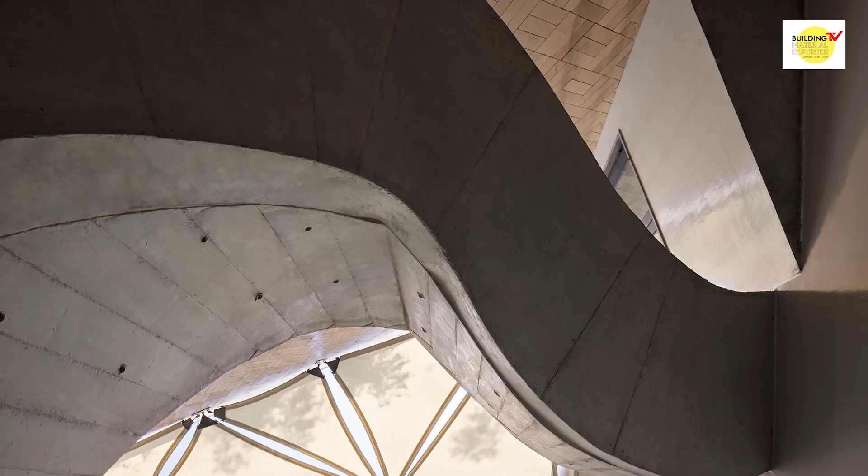At the first meeting, they said they wanted 3 most important things, over and above a long list of things. The clients are 2 kids, age 4 and 8, their parents and their grandfather, so 5 of them live in the house along with 2 didis. They said they wanted a slide in the house, that was their first requirement. The second was they wanted a football field inside the house. And the third was the sloping roof. They said, for us, we've always drawn a house with a sloping roof, that is what means a home to us.

They had a typical rectangular plot, and the way to do a football field on something like that, the first option that comes to mind is to either build right at the back or build a little up front, leaving a pocket of land for football practice. We tried a few options, but were never satisfied with the rectangular smaller sections we were getting front or back, because whatever you do, you would not get the entire length of the plot.

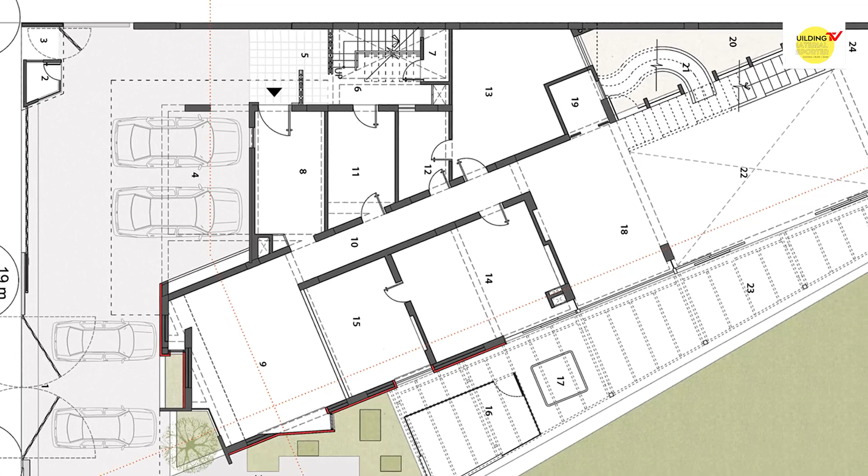Some part of the plot will still go to the built-up space. So eventually what we decided to do was cut the plot diagonally and place the constructed building in one half of that triangular plot, with the remaining triangle becoming the practice field. This means that at the back you get the entire width of the plot to move, and almost the longer length of the plot to run up and practice football.

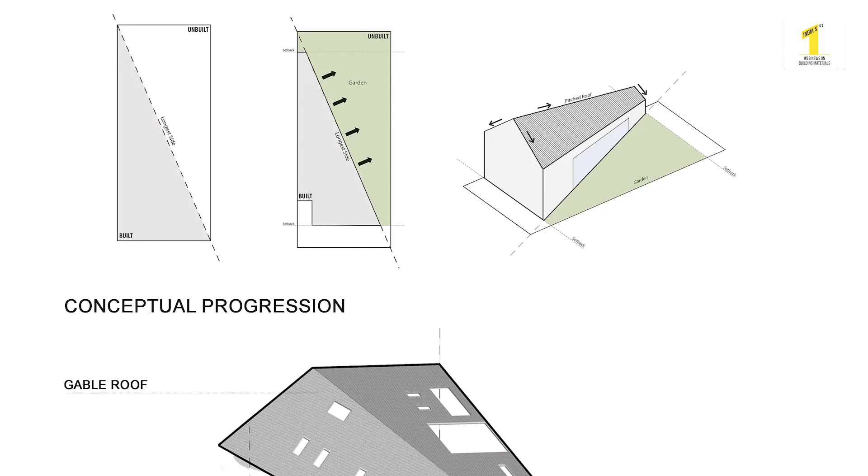We've never tried a layout like this for a residence. It was challenging because now we were fitting functions within the triangle, and I've been asked many times by other people whether it was difficult to fit these different little functions. But when you look at the plan, you realize that apart from one little courtyard in the center for light to come through, you have all rectangular spaces, or pentagonal spaces, which also work much better than tight rectangles.

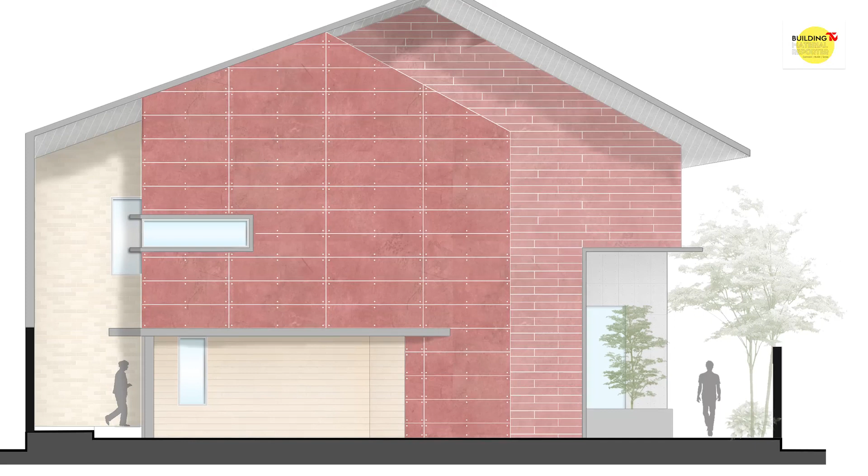We also started with a sloping roof on top, not only from the front, but sloping the entire roof elevation as it goes to the back. So the highest part is in the front, and then the roof gradually slopes down to a 1.5 floor height at the back.

So in front you get the master bedroom and the kids' bedrooms above the very small living room that we finally managed to have. And at the back, utility spaces, kitchen areas, and the rooms for the didis. And in the center, in fact half of the entire area, at 1.5 floor height, becomes this family space.

Because they said that even though we don't have a lot of guests over, we want this common space for the grandfather, the couple, and their two kids to spend all their time in. There is only one TV. They also said we do not want to have a lot of views.

What that meant was that they don't want balconies, they don't want large windows that open onto the street. Because of that, we gave them glazed openings to get light inside - windows so there was enough light coming into the rooms, but these were not opening right out of the front elevation. They were all opening at an angle, so no one can look inside and they don't feel conscious while sitting next to the window.

On the ground floor, however, we kept the entire elevation glazed like that because they have this long green lawn in front of the family space and they really wanted to have that connection with their open space. So that was the second thing.

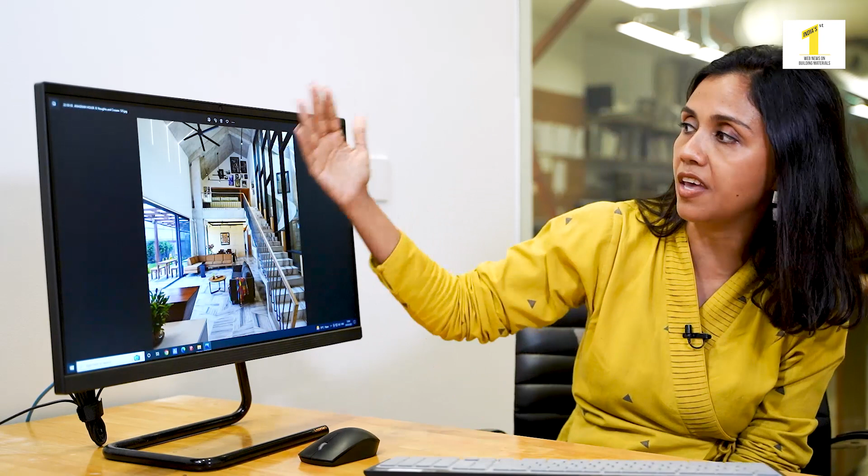We love the contractor we worked with on this project, and we were very happy and satisfied with how the finishes came out in the house, especially that of the slide, with this curving portion that comes down. So that's how we gave them this as an important feature in the open space inside.

So these were the three main items on the wish list. Apart from that, of course, there were many other things, one of which, again not something I come across every day, is a client asking to not put any electrical switches next to their bedsides.

They said, we do not want gadgets to be extensively accessible in the house. We have one TV which will be in one corner, and we want our kids to enjoy the house in as much playful, physical manner as possible and not fall into that situation where it's easy to get hold of a gadget and look at a screen.

So when a client like that comes along, it really forces you to think of various different ways a house can function. They said they have a lot of art, and with kids, they want to encourage looking at art, living with art, creating art all the time. They were very particular about having a maker's studio inside the house between the two kids' bedrooms.

They wanted the kids to be in the same space but also not in the same room. It's actually a single room with a sloping roof on top, and then there's a cabinet design in the center of the room which basically divides the two spaces. The door, which can be used to cordon off one room from the other, is hardly ever shut. So they may not feel part of the same space, but they're still within earshot of each other.

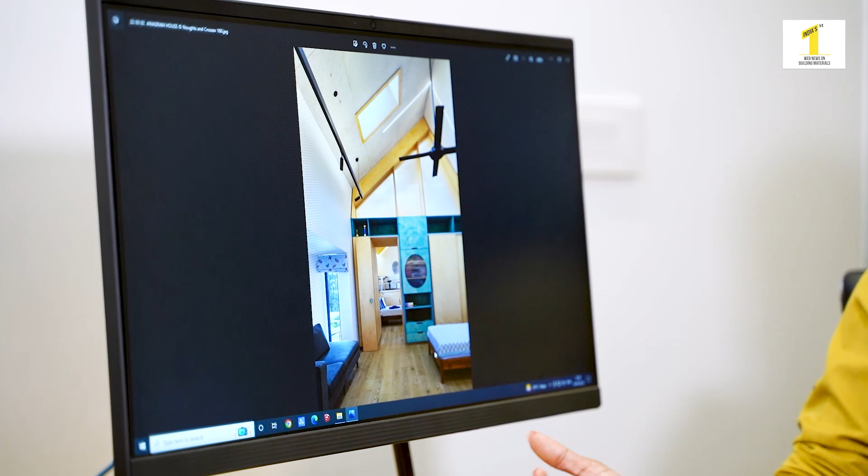Basically, they said the kids needed to feel like they were in the same space, even if as they grow up maybe they don't want to look at each other's faces. So around this floor, the parents gave themselves a much more secluded corner, and the rest was really taken up by the kids with their reading books in the corridors outside, which was quite interesting to do in this area.

Because we did not have a full-fledged living room here, we did have a small room where they could greet anyone, or a guest. So that little room is basically put in one corner of the ground floor, at the front edge of the building.

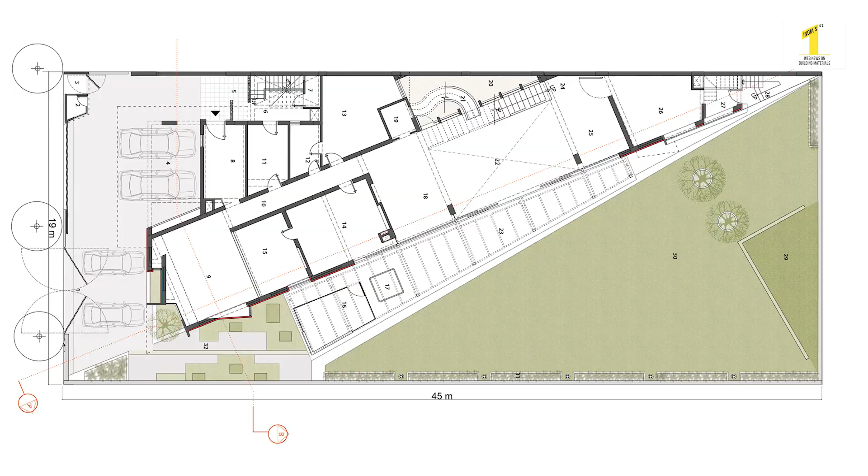More than 50% of the ground floor plate is taken up by the family rooms. This includes the staircase going up, the dining room, their sitting area, the kitchen at the back, and the grandfather's room in front. Their sun room or yoga room sticks out and also has a glazed edge, so it looks onto the garden on this side.

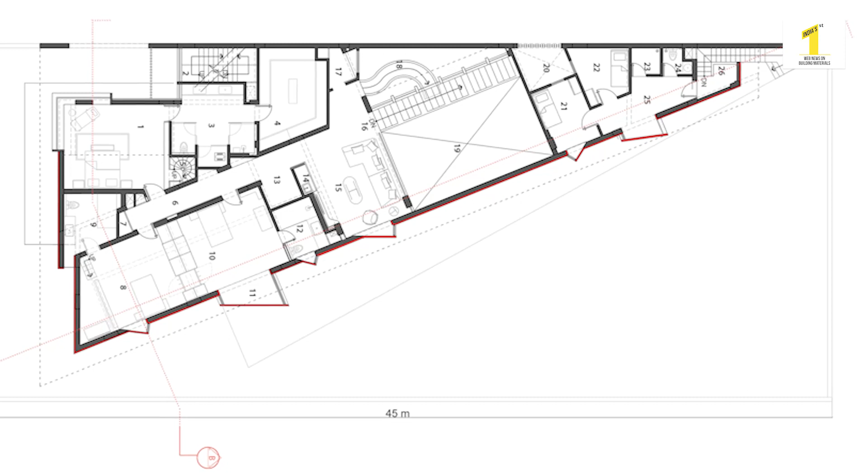So their ground floor is basically where they spend the entire day, inside, outside, depending on how the weather is. On the first floor, which is a slightly smaller floor plate, they have the two kids' bedrooms. There is the master bedroom and the ensuite bathrooms, etc. And at the back over here are the rooms for the didis.

The other interesting thing that we did in terms of layout over here was that the toilet does not open through the dresser, because they wanted the dresser to be even more private and not have any help going through it.

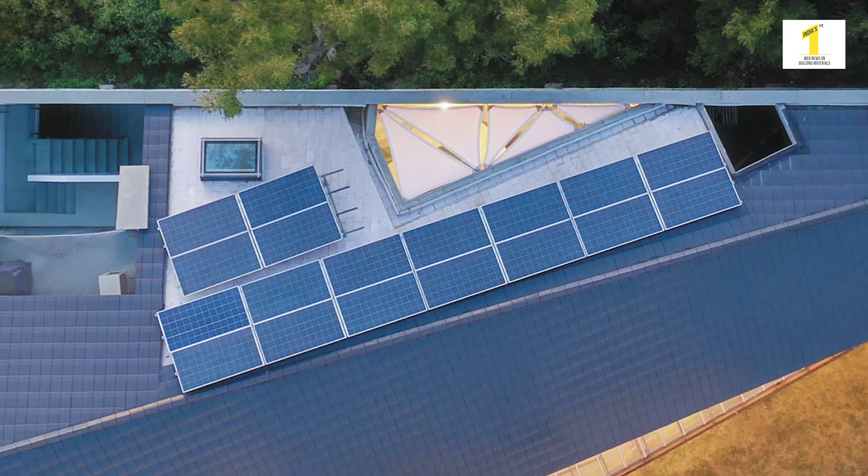There is this triangular cutout which has a fabric roof on top, so you get these interesting shadows forming on the wall from inside. You can see these skylights that we created because the bedrooms below this floor do not really have large windows opening onto the street, so a lot of the light comes from the skylight here.

Now these skylights needed to be shaded as well, so we had to use automatic motorized blinds that, on the flick of a button, shut themselves off from here. We have solar panels over here.

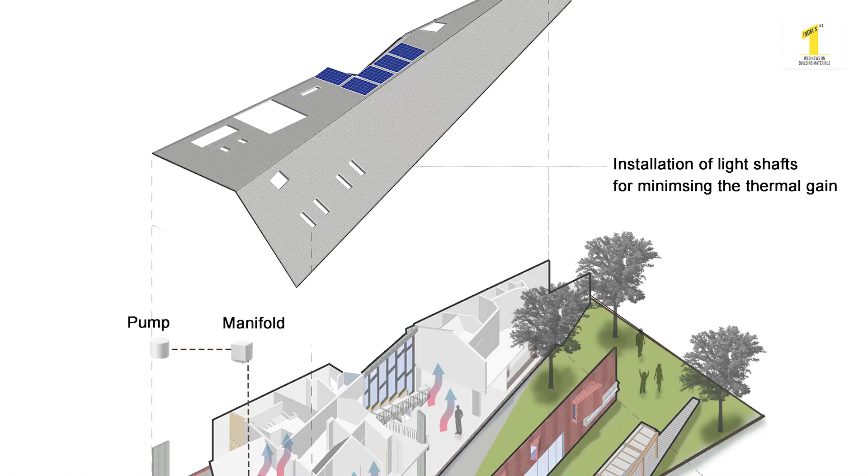Since we're talking about the project, it's about having shaded areas, enough ventilation, and less dependence on energy as much as possible. There is this little staircase that helps access the roof on top to clean it.

I spent a day again with the client the other day when we were trying to get the building photographed, and I could see that they were really enjoying the house. So all in all, I could see a very satisfied client.